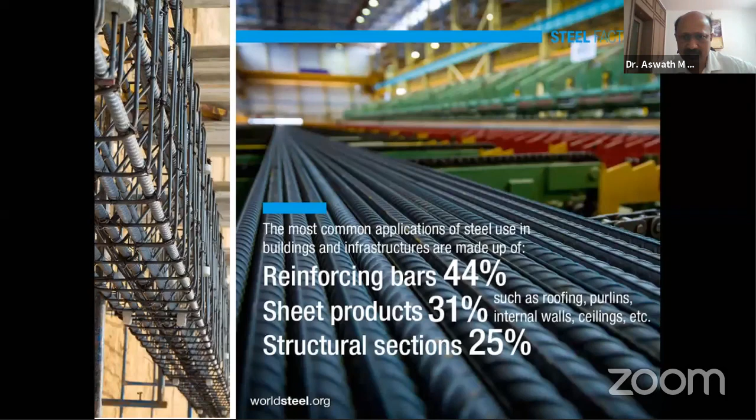Manufacturing, and where we have to bother about the quality of this steel, reinforcement steel, about 44%. So why we talk about quality?

As I mentioned earlier, quality is not just necessary for reinforcement steel, but it is also necessary for other products. Since our industry is not controlled, many of the products are manufactured without any quality control in place. Anybody who has got some finance can start product manufacturing in our industry.

And there are no strict guidelines or eligibility criteria for giving licenses to product manufacturers. So with this background, as users, as civil engineers, we have to be very careful about the quality, and we should identify and select the manufacturer and supplier of products based on their background and quality consciousness. Once we start recognizing quality conscious manufacturers and suppliers, then automatically the industry will transform from unorganized sector to organized sector, where quality will be one of the most important criteria.

As I mentioned earlier, for concrete products, we have been doing a lot of activities and programs, seminars, workshops, and other things to sensitize people about the quality of concrete. Now we should talk more and more about reinforcement steel also in the days to come.

So we have various issues in the civil engineering industry, whether it is storage of material, whether it is fabrication, various aspects. It may not be so bad as of now. Some time back, I've taken these photos from open source.

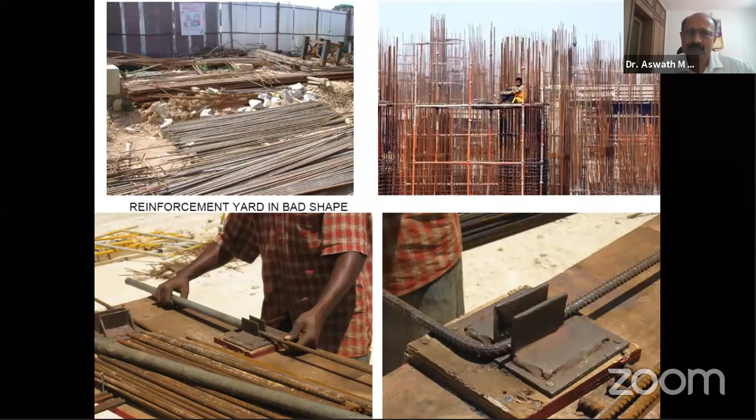You can also see some of these sites in the scenes where corrosion and other aspects are not taken care of, and demolished steel is also reused without processing. That is also another issue.

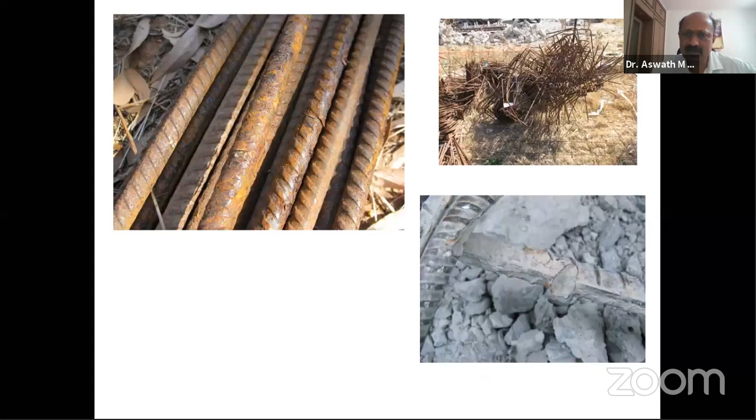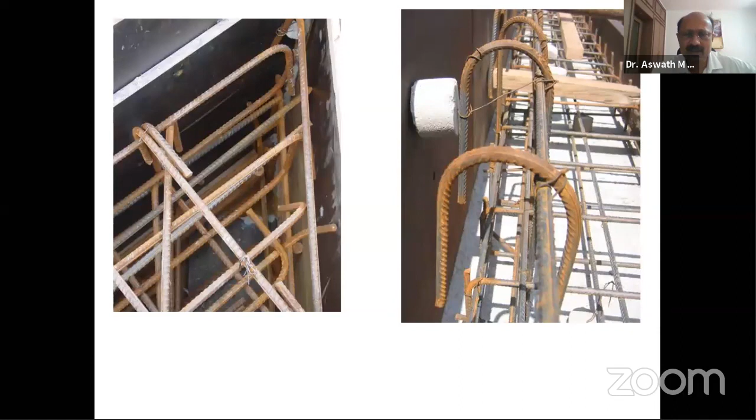And fabrication also has a lot of issues. We should know how to detail the reinforcement. So detailing of reinforcement is another major area. All of us involved in the analysis, design, and implementation should take care. And we can have one more webinar on detailing of reinforcement also.

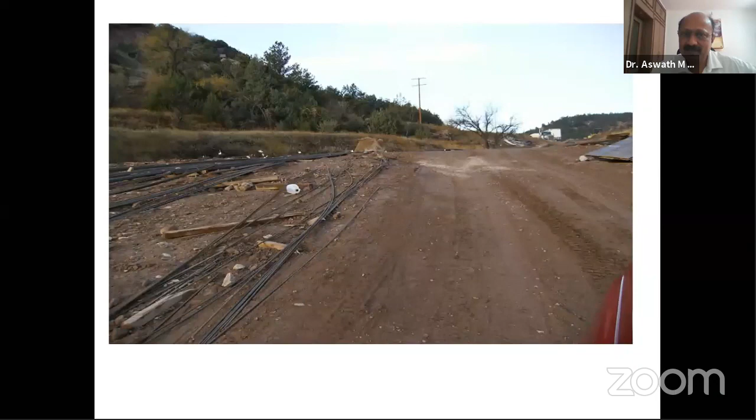And proper concreting methods are also very, very important. So these things are there. So when you look at these issues, we have construction quality as a whole as a major concern.

Even though many of the high-tech consulting firms are there, and multinationals are into the industry, and major projects—maybe construction quality is taken care of—but the medium and small industry projects, we still find some of these issues are there.

And definitely we should find solutions to all this, and address from the manufacturing process, and we should see whether the proper infrastructure is there to manufacture from a particular manufacturer, and selection of the manufacturer and supplier based on the quality systems that they have implemented.

Because that is the place basic properties of the material are concerned. Unless they have a proper infrastructure and manufacturing process in place, we will not get a good product.

So then understanding the properties and behavior of the material as a reinforcement, we need to understand. Then once we understand the properties and behavior, we become more sensitive to select a good product.

So how to store and use the reinforcement, again, there are a lot of aspects which make a lot of difference in the overall strength of the building. And testing of reinforcement and quality checks at each level.

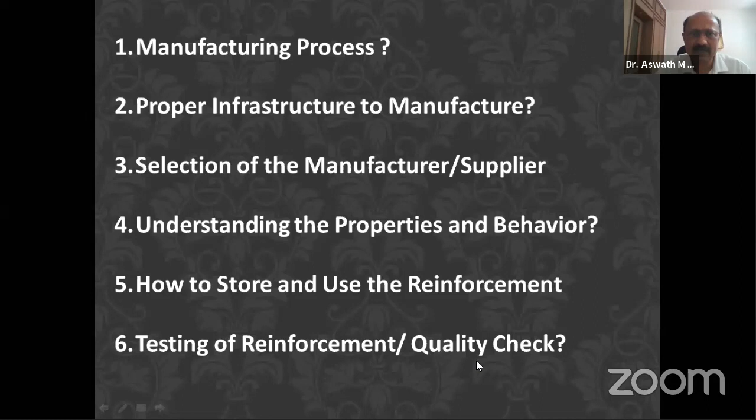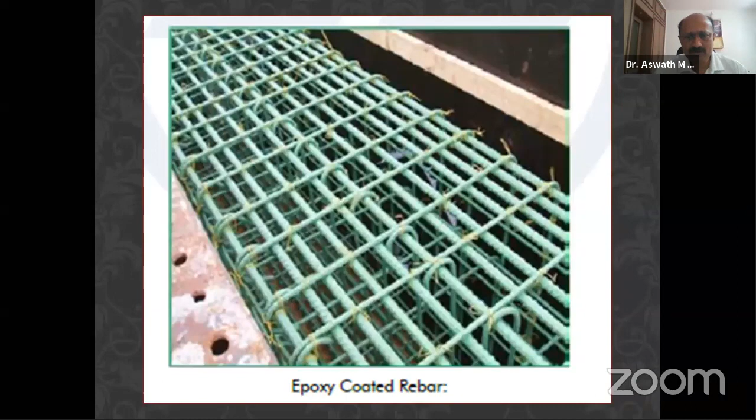So we have different types of reinforcement bars. You have deformed bars, stainless steel bars, epoxy coated reinforcement bars, then galvanized rebars, and FRP bars are very popular these days.

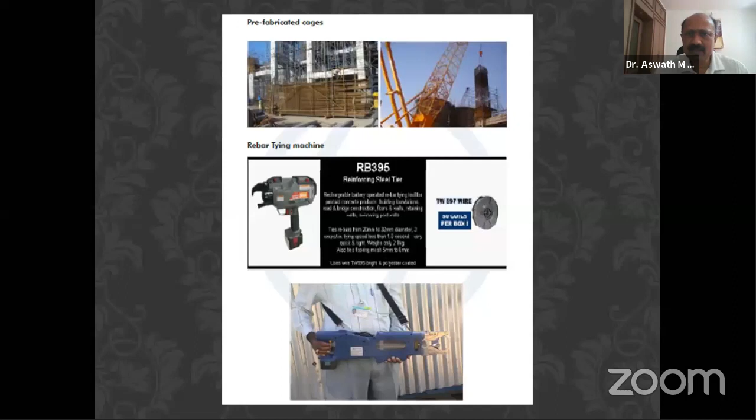A lot is talked about the equipment used for reinforcement fabrication and other things. Rebar tying machines are available. We should use all these latest methods to minimize loss and improve the efficiency of use.

We are having a lot of couplers in place. We can save material if you use proper couplers.

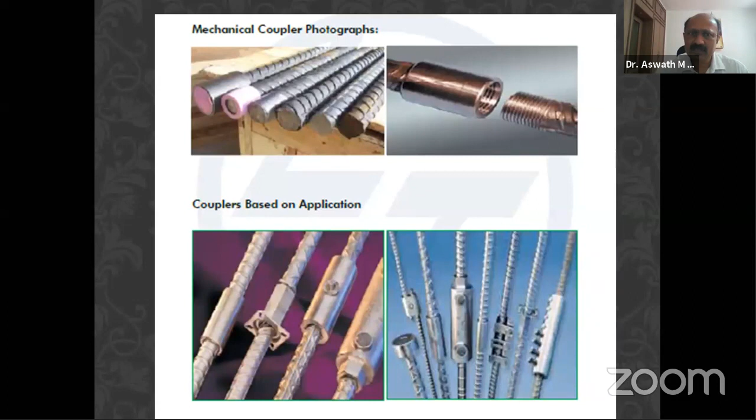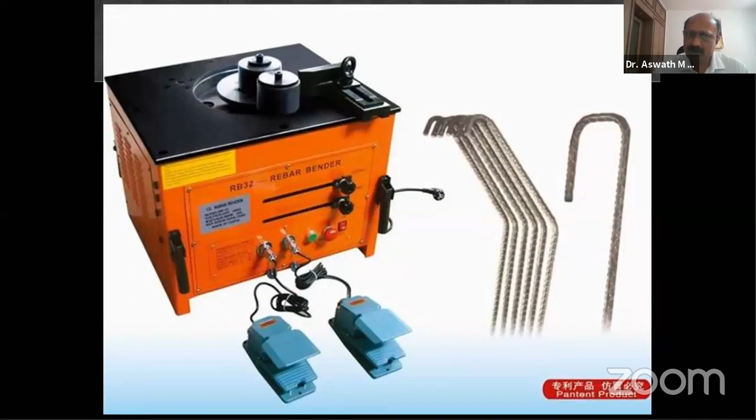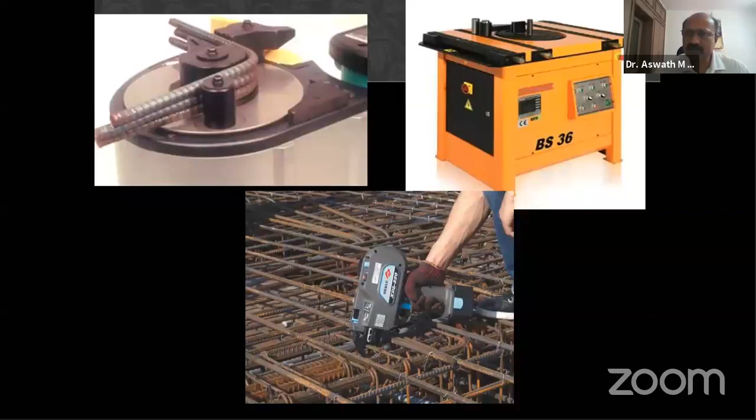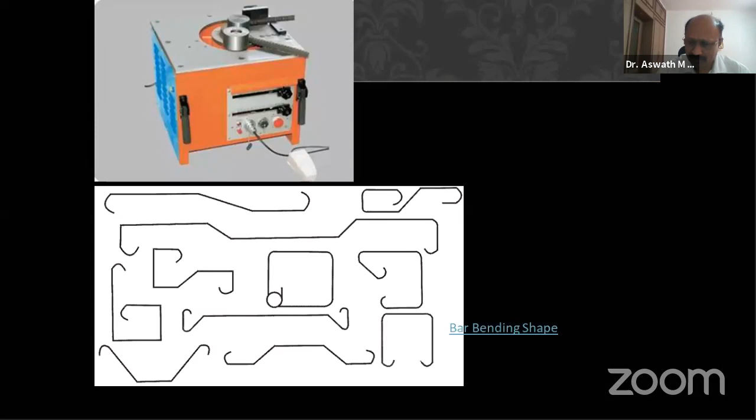We have different tests for the reinforcement, and bar bending machines are available these days. There are a lot of solutions available based on each of the problems we face in the industry, developed by various manufacturers. We should be aware of what is available, and based on that knowledge, select the best material, product, and equipment for reinforcement. Bar bending is a major aspect in reinforcement steel, but many times we use bar benders who are not skilled or properly trained, so we end up with a lot of problems as far as bar bending is concerned.

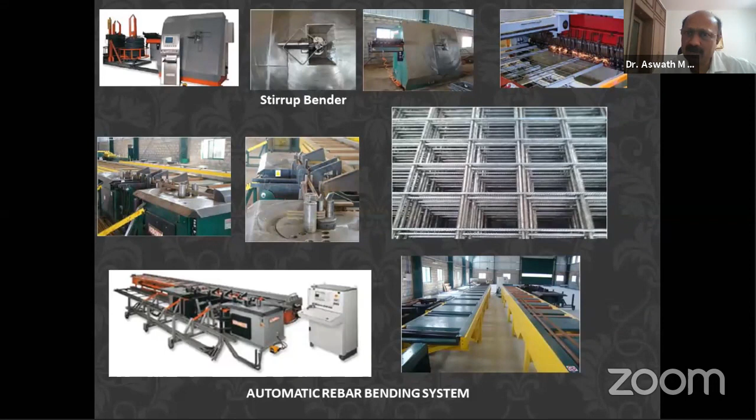Automatic rebar bending systems are also in place to address bar bending issues. Now many people are coming into the industry who, if you give them the reinforcement drawing or execution drawing, will supply ready-made steel. You can just bring it, place it, and start concreting.

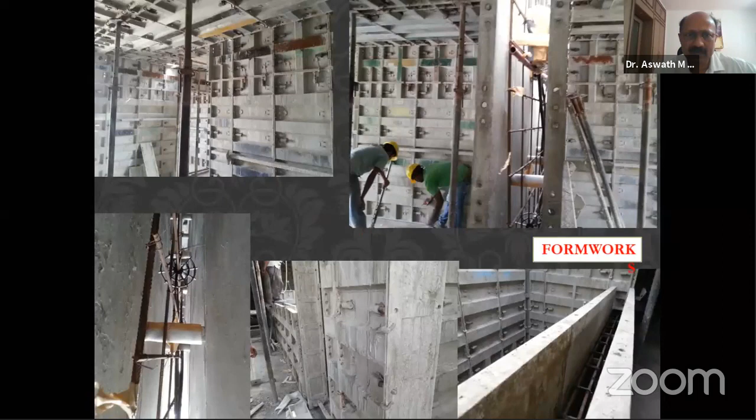This is also getting more visible in the industry. And the accessories used with reinforcement - cover blocks and other chairs, as we normally call them - take care of these aspects. Each of these is a major area where the user should be aware of the different products available. Formwork is also another major factor responsible for the quality of the structure and the use of reinforcement.

From M15 concrete, now we are talking about M200. We have already demonstrated M200 concrete in one of our concrete webinars at the Indian Concrete Institute. But widely, people are now using M60 and M80 grade concretes, and M120 is also used in some projects. As we use higher grade concretes, we reduce material usage.

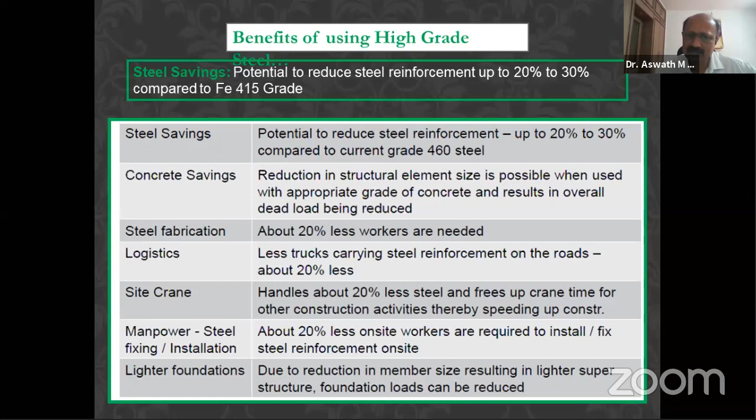Similarly in steel, we used Fe 415 steel; now we are talking about Fe 600 grade steel. So it is always better to select a good manufacturer and use higher grade steels. There are a lot of benefits if you use high grade steels, so we should promote more usage of high grade steels to reduce material usage.

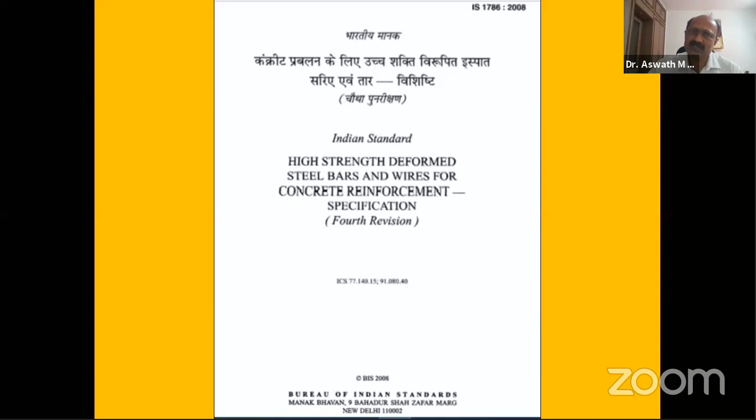For all this, our Bible is IS 1786:2008, amended in 2012. This is our major reference. When we talk about concrete, we have IS 456. When we talk about structural steel, we have IS 800. And when we talk about reinforcing bars, our Bible is IS 1786, high strength deformed bars and wires for concrete reinforcement specification. I strongly recommend all users of reinforcement steel read IS 1786 completely and understand every word printed in this code - it is very, very important.

In the industry, we have all these materials: Fe415, Fe415D, Fe415S, Fe500, Fe500D, Fe500S, Fe550, Fe550D, and Fe600. Now Fe415 has very minimal use and is not available unless you demand it from manufacturers. The majority of manufacturers produce Fe500 and Fe550. If you ask, they will also supply Fe600. These are the major grades.

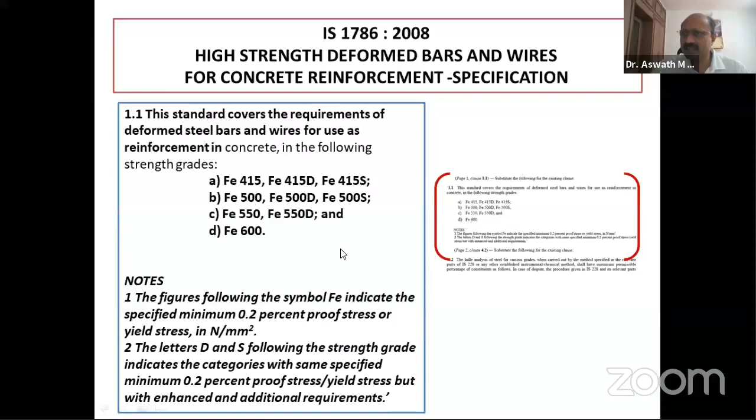I have taken an extract from IS 1786, and these are very, very important. Let us focus more on these high grade steels which are presently used in the industry, especially in the form of TMT, thermomechanically treated bars.

When it comes to the composition of steel, normally we don't give a lot of importance to the chemical analysis of the material. As site engineers or project engineers, we check for tensile strength of the reinforcement, and when it comes to concrete, we do the cube test for compressive strength. When it comes to steel, we check tensile strength. But compressive strength and tensile strength are not the only two strengths responsible for the overall safety, longevity, and durability of the structure. There are many other issues also responsible for the long-term efficiency of the building.

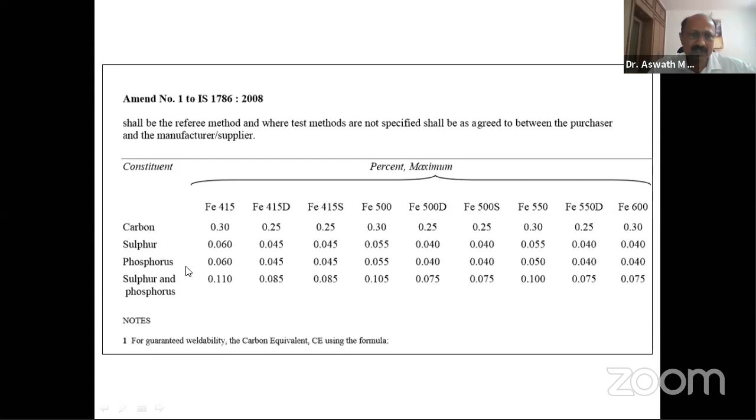When we talk about reinforcement steel as per the IS 1786 amendment, these are the major ingredients responsible for the properties of the steel: carbon content, sulfur content, phosphorus content, and the combination of sulfur and phosphorus - these should be as per code 1786. For Fe 500, the carbon content is maximum up to 0.3%. Initially I mentioned the maximum usage should be about 2% for various other types of steel, but for reinforcement steel, carbon content should be less than 0.3%. Sulfur should be less than 0.055%, phosphorus 0.055%, and sulfur and phosphorus together should be less than 0.105% for this particular grade. For other grades of steel, it is mentioned in the code. This is mainly responsible for the properties of the steel.

And the nominal sizes of bars are available in the market, ranging from 4 mm to 50 mm. 8 mm, 10 mm, 12, 16, 20, and 25 are widely used. The higher diameters of 28, 32, 36, 40, 45 to 50 mm are not widely used, but are available in the market.

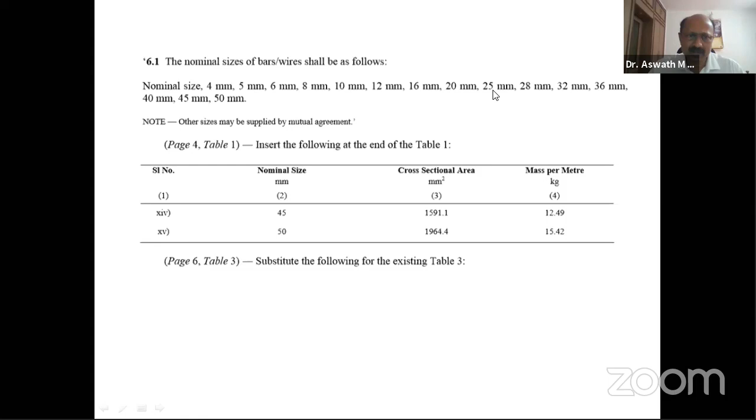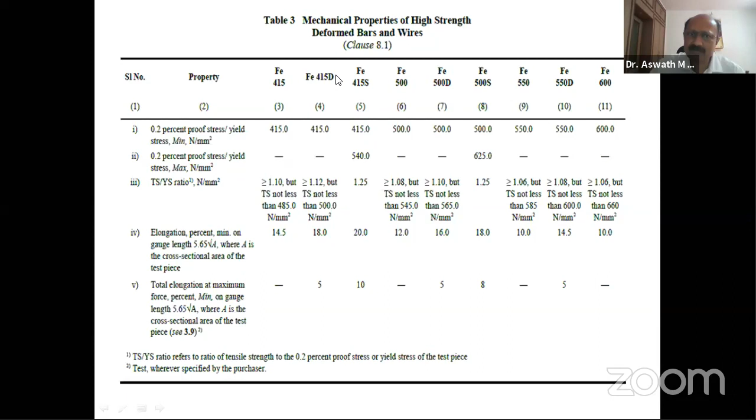So this table should be remembered by all civil engineers when using reinforcement steel, and it is very important. Many manufacturers don't give a lot of thrust in maintaining these elongation ratios. For example, for Fe415D it should be about 18%, and for Fe500 it should be about 12%. So this is also very important.

Elongation and total elongation are also given, and the ratios of TS by YS should also be properly maintained. So when you test the material, these aspects should be taken care of.

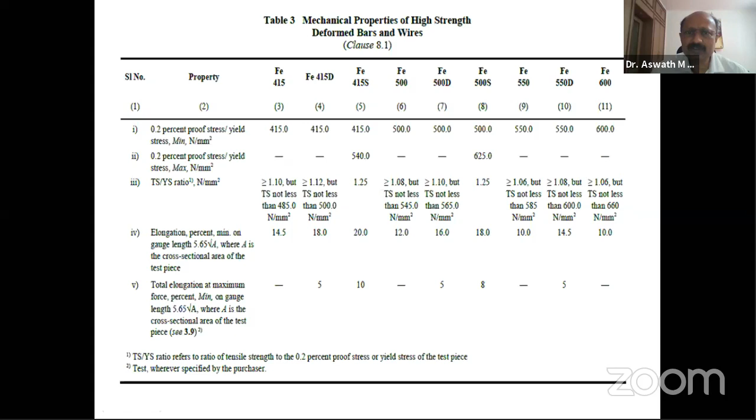And the composition of the various chemicals, the chemical analysis, if you do it, normally you have a lot of instruments to check the chemical composition of reinforcement bar. Spectrometers are available which give you up to 27 elements present in the steel reinforcement. Based on that analysis, if you look at the contents and identify these materials, based on the percentage of materials present, the mechanical properties of the material will also change.

For example, carbon - higher carbon contributes to the tensile strength. So that means more percentage of carbon gives more tensile strength, but you should be very careful - higher load bearing capacity and vice versa. Lower carbon content, less than 0.1%, will reduce the strength.

Higher carbon content of 0.3% and above makes the steel bar unweldable and brittle. So you cannot increase the carbon content just because you get good tensile strength, because if it is more than 0.3%, the material becomes unweldable and brittle. So therefore you have to be very careful about using the carbon content.

We are also very particular about sulfur and phosphorus. Higher content of sulfur and phosphorus is very bad for reinforcement. For example, presence of sulfur should be limited as per IS 1786. Presence of higher sulfur makes the bar brittle during twisting, as higher sulfur content brings the hot shortness problem during rolling. So when you do the bending and rebending test, if you have more sulfur and phosphorus, it becomes very difficult for bending or fabrication operations.

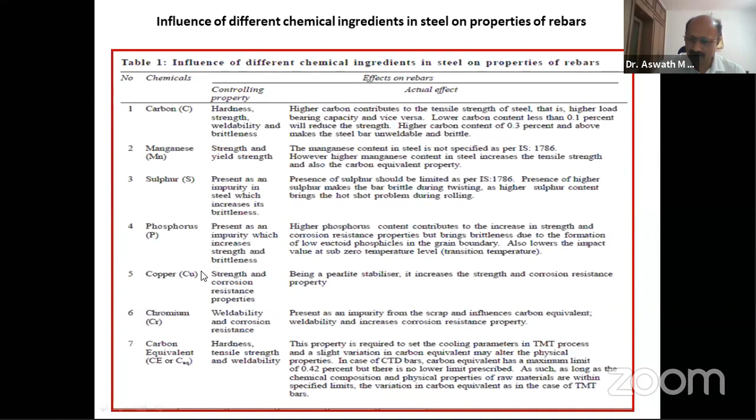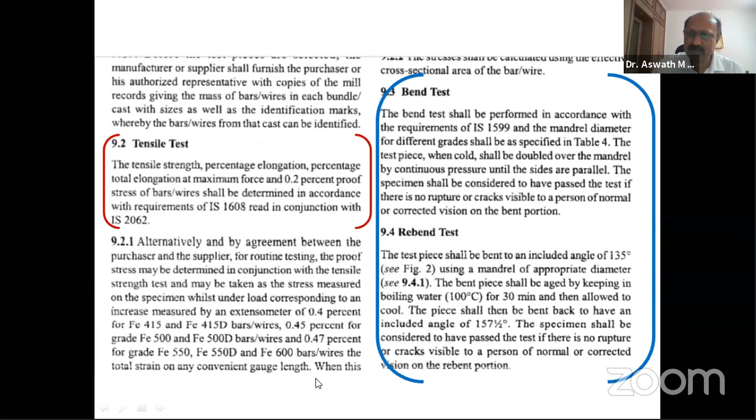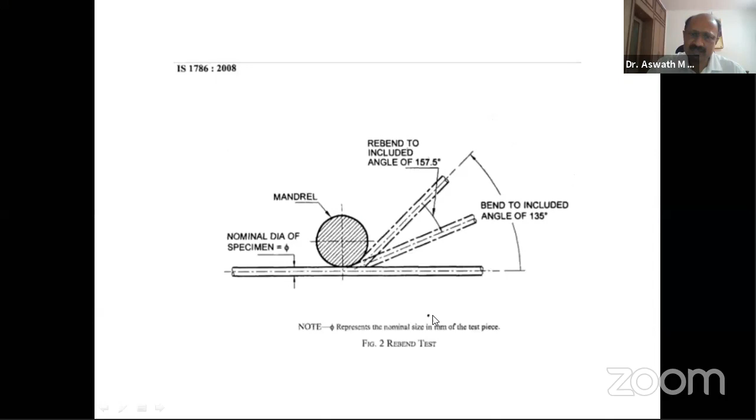I will not get into the procedural aspects of testing, as clear indications and procedures are given in IS 1786 and other relevant codes. Use that, or use the facilities available in one of the accredited laboratories as per NABL, and you get good quality test results and properties of the material. The mandrel diameters for rebend tests are given in the code, and this should be used for effective testing methods.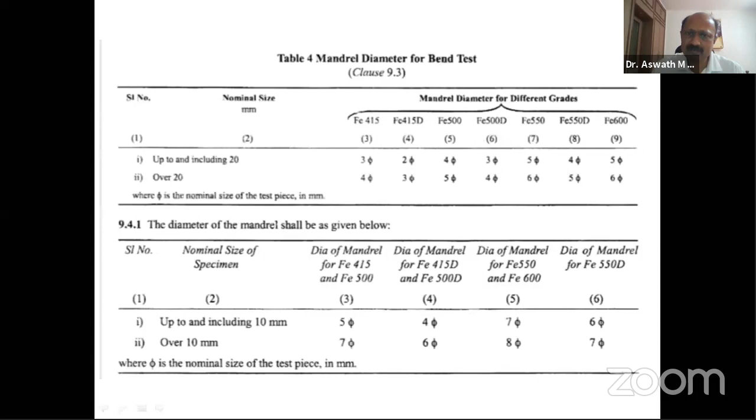So some sample specifications for reinforcement. I've talked more about IS 1786 and should not be boring for all of you. The main codes are IS 432, IS 1786, and IS 2062. These three codes are mainly important for mild steel, high strength steel, and structural steel.

Read these guidelines given by BIS. I'm very happy to state that the Bureau of Indian Standards is very efficient and active these days. The BIS Civil Engineering Division is headed by Mr. Sanjay Pant, and he is taking a lot of effort in revising all the codes. Earlier, to get a code revised, we used to wait for 10-15 years. Now, every year, a lot of codes are revised as per the requirement of the construction and civil engineering industry. You can visit the BIS website, contribute to the development of the codes, and send your comments for revision. So a lot of opportunities are available for civil engineers to get into codal formation and preparation. You can visit the BIS website for more details.

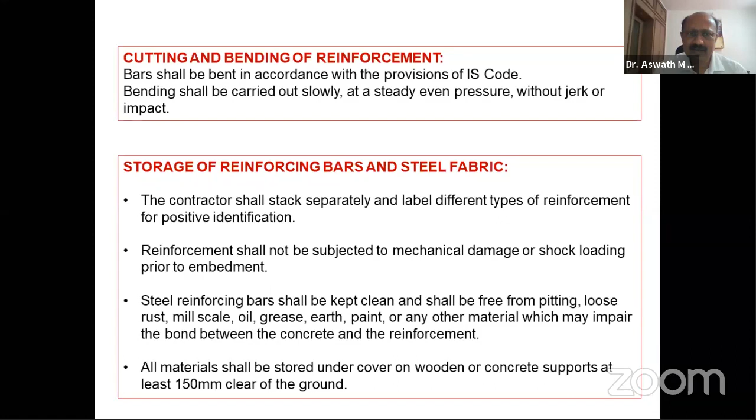As I mentioned earlier, there are a lot of accessories like spacer blocks, cover blocks, chairs and others, so we should know how to use them effectively. Cutting and bending is another major aspect, and again we have a code for that which we should use effectively. Storage of reinforcement bars and steel fabric is also important, and we have to use proper methods and checks to take care of reinforcement at the site. Fixing reinforcement is the major job, that is the detailing of reinforcement, which should be done as per the structural engineers' recommendations and the detailing code of IS.

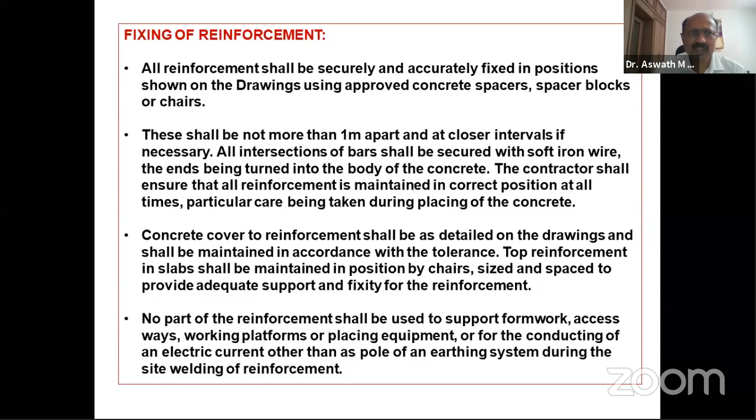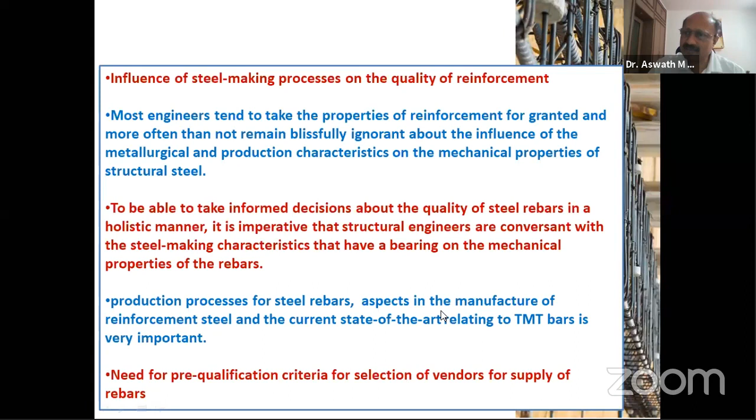Now come back to where the bar quality is affected. Checking, testing, and usage of reinforcement is the responsibility of the structural consultant and project engineer, but if the material itself is not good, then we can't do anything. Whatever methods we adopt to take care of quality becomes waste. So the influencing factor for quality of reinforcement is the manufacturing process, the steel making process. We should give a lot of importance to the manufacturer while selecting reinforcement, and the characteristics of steel reinforcement are also very important for strength, ductility, and corrosion resistance. These aspects we should take care of.

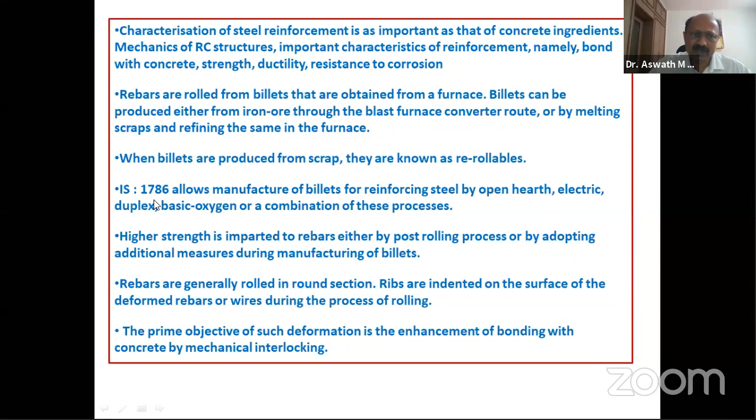IS 1786, as I said, is very important. There are different types of twisting of bars, but I will not get into it. Now, most of the steel we are using in the construction industry as reinforcement rebars is TMT bars, thermomechanically treated bars, introduced in India during 1980 and 85.

Thermomechanical treatment is an advanced heat treatment process in which hot bars coming out of the last rolling mill stand are rapidly quenched through a series of water jets. At 1700 degrees Celsius, the molten material comes into billets, and the billets are rolled into reinforcement bars. In this process, the hot bar should be cooled to normal temperature, and this cooling and quenching process is very important. If you take care of this process effectively, you get good quality TMT bars.

Rapid quenching provides intensive cooling of the surface, resulting in the bar having a hardened surface with a hot core. The rebars are then allowed to cool in ambient conditions. During this slow cooling, the heat released from the core tempers the hardened surface, while the core is turned into a ferrite-pearlite aggregate composition. This is an actual sample I have taken from a factory. After this proper quenching system, you get rings like this, which in the field people use as a ring test. You have to conduct a ring test on a reinforcement bar, and if you get three rings like this - the core, the transition layer, and the outer hardened surface - then it is a good quality, properly manufactured TMT bar.

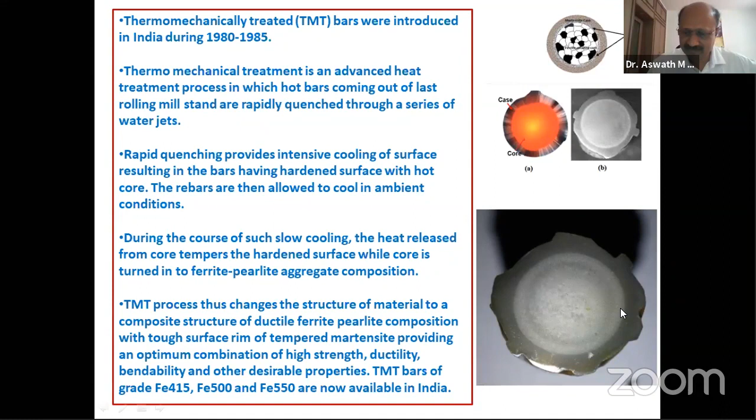So this is the process of TMT bar. It is a heat treatment while manufacturing the steel. So you can identify the bar. This is one common test everybody can do at site for identifying whether it is a good quality TMT bar or not - to identify a quenched and tempered TMT bar.

Project site engineers and all civil engineers should be able to distinguish and identify good quality bars. Ensure the mill that has supplied the rebars has genuine quenching and tempering technology. Check whether the Q&T technology supplied to the mill is by an authorized and competent organization. Check the license. All these things we don't do, but if you identify a good manufacturer, they will take care of all these things.

So what is the field test? Field test the rebars at random. The first thing to be done is filing the surface of the rebar with the help of workers using a rough file. A site worker will easily recognize if the surface is hard or soft. All Q&T bars have a harder surface than unquenched bars.

Finally, a random sample should be drawn. You take a sample reinforcement bar from the lot, and you finish the surface with emery paper and a small file, and then the cross section is smoothened to a fine polished state by grinder and emery paper. The smooth end of the sample is then pickled in a nitrol solution, 5 to 10% nitric acid balanced with ethyl alcohol. The result should show a uniform tempered martensite periphery with a softer core in case of a good TMT bar.

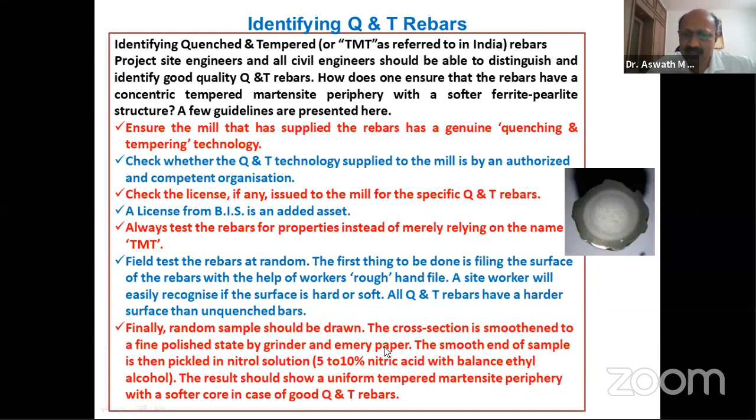So when you press this reinforcement bar's finished surface into the nitrol solution, you should get a surface like this, and you should be able to identify by naked eye the three rings of the bar. If you get that, then you can say it is a good quality TMT bar. So in the absence of other more refined tests, this can be done by any engineer with a simple test of dipping into the nitrol solution at the site.

So as I said, the process of manufacturing is very, very important. I'll run through the process, I think we have time. So if you're using the reinforcement continuously for your projects, it is absolutely necessary for you to make a visit to the manufacturing plant.

Like we visit the RMC plant before ordering concrete, we will send our project engineer or quality engineer to the RMC plant to check how the plant is managed, whether the skilled workforce is there in the plant or not. Everything depends on however automated the industry we are talking about is. Unless we have trained, skilled manpower at the plant, it is very difficult to manage the process. So you need to have trained, skilled manpower for RMC production.

Similarly, you need to have trained engineers, or metallurgists specific to the steel industry, at the plant who can process the manufacturing for the steel as per the requirements of the IS codes. So visit the plant and get convinced yourself about the manufacturing process and the quality checks that they are following. If the manufacturing process is good, then automatically we get good quality reinforcement steel. So I insist all users get convinced about the quality of the manufacturing process before you order your reinforcement steel. As such, we don't have any certifying systems for the reinforcement steel industry.

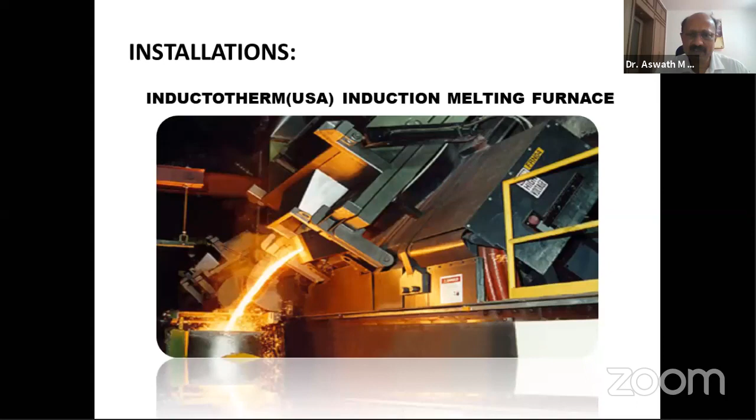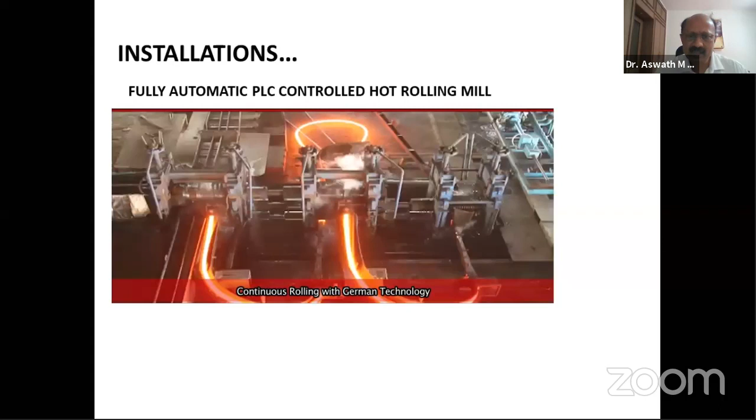We have QCI certification for RMC plants. Similarly, we need to evolve, in the days to come, some kind of certifying process for the reinforcement industry also, the steel manufacturing industry also. So normally they will have a continuous billet caster if they have good infrastructure for manufacturing the steel. Then you have fully automatic controlled hot rolling systems in the industry for good infrastructure for manufacturing.

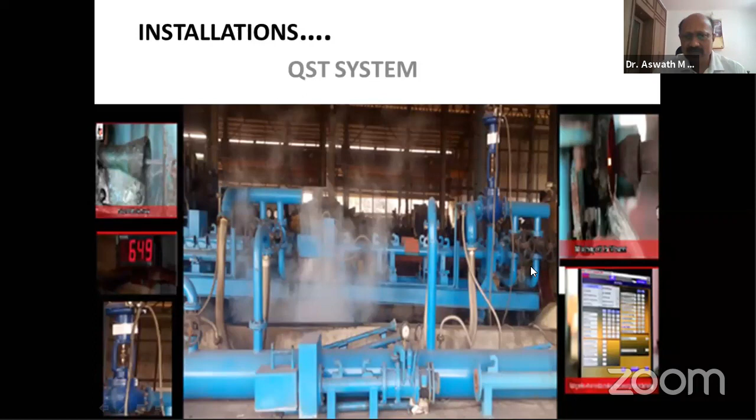Then you should have an automatic cooling bed once the bar is cut into different sizes. And during the raw material stage, as I mentioned earlier, many of the good manufacturers use a spectrometer for chemical analysis of the raw material.

Once they use raw material, before moving forward for the manufacture of steel, they should check the samples. I have taken this from one of the manufacturers' testing facility.

The spectrometer will give about 27 chemical elements, the composition of chemical elements, and you get a computer generated tabular result like this, and you have to see the composition of the various materials. Compare with IS 1786, what is the maximum allowed percentage of the materials of various chemicals, and remodel the mix, in other words the composition of the raw material.

If something is less than required, then you have to add, and if it is more, you have to eliminate. That process you have to do before allowing continuation of the manufacturing process. So spectrometer analysis is very, very important, and it determines the durability of the material also.

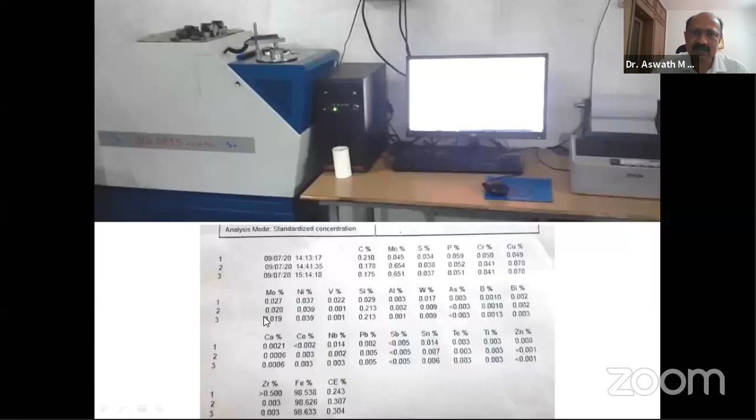And you get a sample test like this. This is a report generated by the spectrometer. The date and timing is also mentioned, so that gives an indication for every batch of manufacturing of the billet. You do this test very systematically, and you get the combination of all 27 elements here. This is one of the very, very important facilities any manufacturer should have at their manufacturing plant.

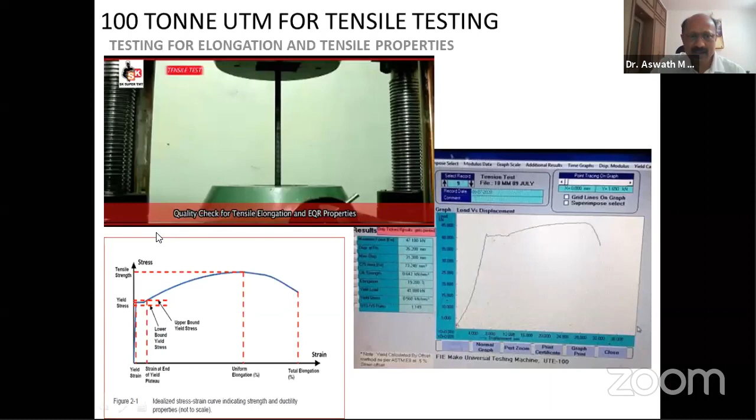After manufacturing, you have to test the bars as per the sampling requirements in the factory itself, and see whether you get good performance of the material as per the standard requirement at the site itself. So this is sample collection and testing at the site during the charging process.

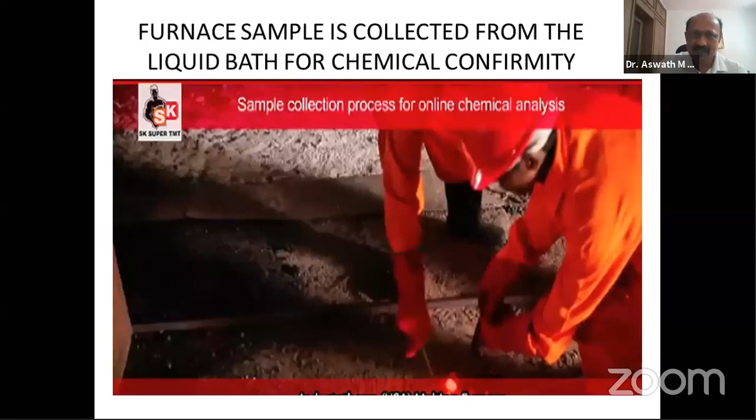These images are just showing you for the purpose of understanding what is the manufacturing process and how important it is. This is the quenching of bars, how the hot bar which gets into the quenching system comes out after cooling.

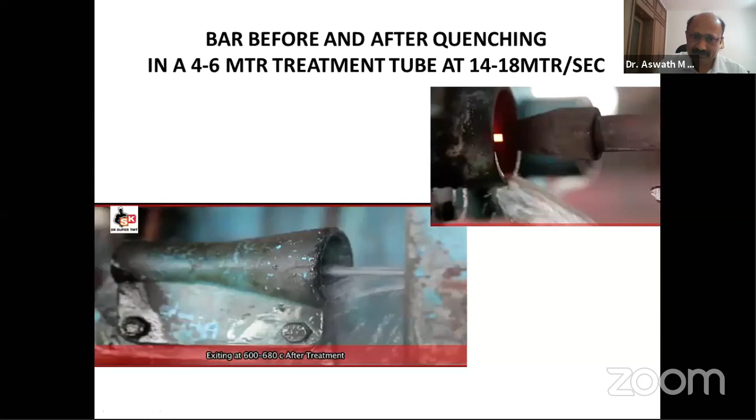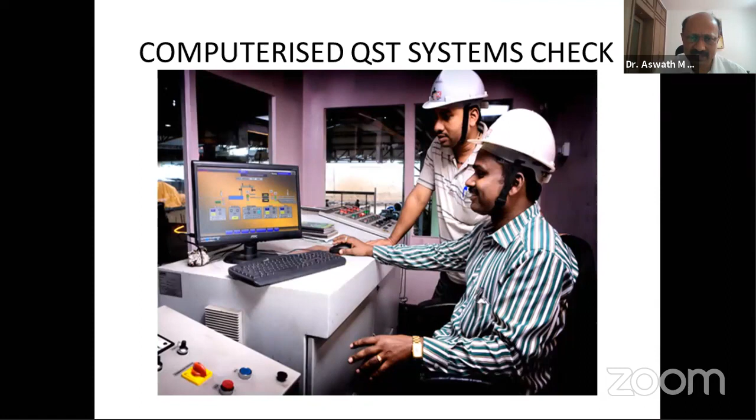Outlet bar temperature control panel. Almost all good manufacturers will have automated computerized QST system these days, and it will ensure good quality manufacturing, will also ensure the grade. The allowance is about plus or minus 20 degrees Celsius.

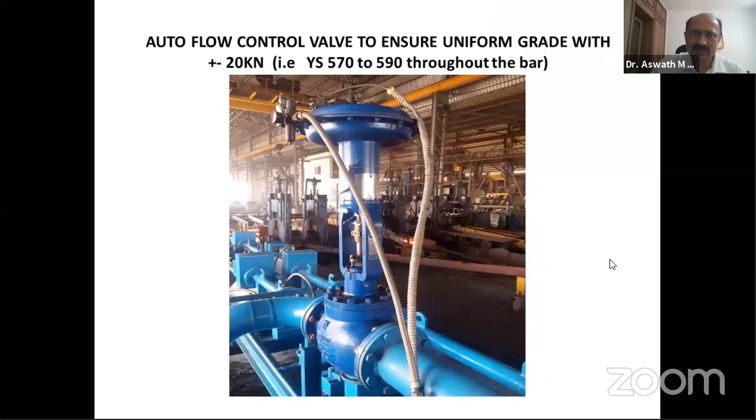And you will have automatic bending and cutting machines at the place.

So the next few minutes... Rahul, I think I have some more time.

Okay, the defects in rolled steel inspection and testing. Some checklists I have given here at the end, before concluding. I think it's very, very important for all of you to take care of this. In order to produce satisfactory rebar products, it is important that an adequate quality control system be established and maintained. This system should include mechanical and metallurgical testing as required, and the inspection of the surface and other defects.

Metallurgical testing: the complete process is a metallurgy-driven one, and a metallurgist is very, very important to be stationed in the manufacturing plant to control the chemical composition of the reinforcement.

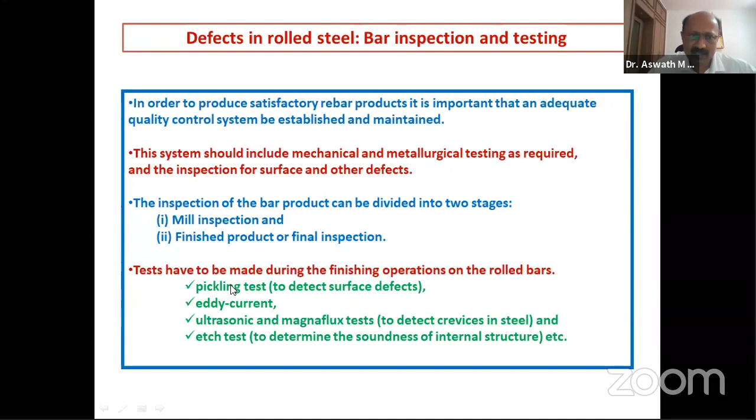The inspection of the steel bar product can be divided into two stages: mill inspection and finished product or final inspection. Tests have to be made during the finishing operation on the rolled bars: pickling test, eddy current test, ultrasonic and magnaflux test, and etch test.

Manufacturer record and delivery documentation: you have to insist on this as per 1786 and other relevant codes. The manufacturer should give some basic information to the user along with the supply. The manufacturer shall establish and maintain the records required and shall identify the steel reinforcing bars and their delivery documentation accordingly. For each delivery, the manufacturer shall supply the following information. It is mandatory; you can demand all this information from any supplier. It is not just bring and dump on the site and go.

Manufacturer's name and place of production, nominal diameter and grade, the heat cast number and cast analysis including all specified elements and elements used for calculation of the carbon equivalent value, the results of the tensile test and rebend test, the mass per meter or weight of the reinforcement bar, the results of surface geometry measurement or beam test, the manufacturing process route — which method, as we discussed earlier there are two routes of manufacturing — which method they have followed. For ribbed steel reinforcing bar, the rolled-on identification mark on the bar: they have to print the IS number and the brand mark that should be there, and result of a fatigue test if required by the purchaser.

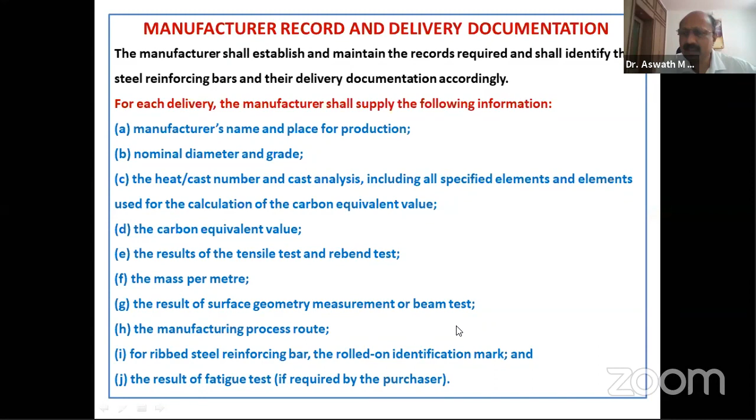This is optional. All other information should be supplied along with your delivery list, along with the bill, in other words.

So, checklist for initial scrutiny of drawings and schedules — this is also very, very important. We may talk about so many things, the manufacturing method should be like that, everything. But finally, before implementing the reinforcement, before using the reinforcement, if you take care of all these issues, then automatically we can avoid a lot of unwanted items, and we can focus on the quality.

Can the reinforcement as detailed be fixed? Does the detailing permit sensible location of construction joints?

Sometimes it is also very important that the site engineer and project engineer, especially the civil engineer responsible for fabrication of the steel at site, should have knowledge of all these things and detailing exposure. You cannot, most of the times, blindly assume that a drawing coming from a consultant can be directly implemented. You should glance at the drawing and identify whether it is okay or not. Sometimes, in a hurry or under demand pressure at site for the drawings, a junior might have released the drawing without scrutiny from the higher ups. So you cannot simply implement the drawing as it comes from the consultant.

I'm not blaming the consulting offices, but it is also very important that as civil engineers, we should glance through, and if anything abnormal is visible in the drawing, it should be brought to the notice of the consultant and rectified before using. Because once you cast the reinforced concrete, it is very difficult to undo the process. Many times, even though we identify small mistakes after concreting, we ignore them. We don't undo the process, we don't demolish and redo the work. So with this in mind, these tips are very, very important for all civil engineers.

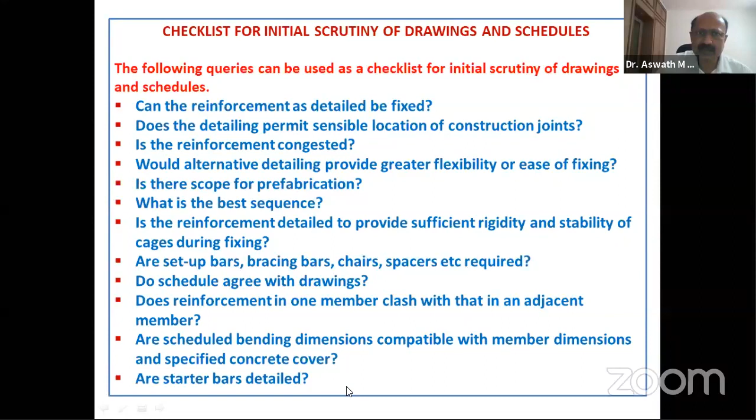So, for the delivery checklist: ensure adequate offloading space, check weights given on the delivery ticket, ensure correct handling during unloading, check reinforcement is of the correct type, bundles are correctly labeled, and check reinforcement is of the correct grade.

This is very, very important. Normally, they supply the steel and you use it. You might have ordered Fe 500, or 500D, or 500S. You need to check whether you're getting the same steel at the site.

Before issuing to site fabrication, you should check all this. Check the bar sizes - this is also very, very important. Many times, small variation in bar diameters, if not properly checked, means instead of using 16 mm you might end up using 12 mm or 20 mm. This kind of mistake also happens on bigger sites, so the project engineer should be very careful about all these things.

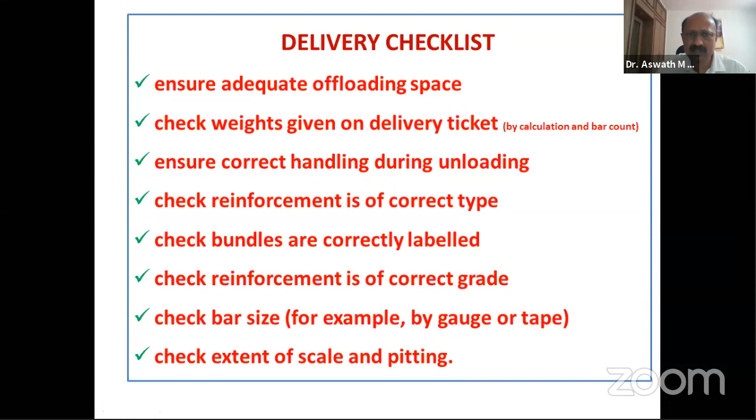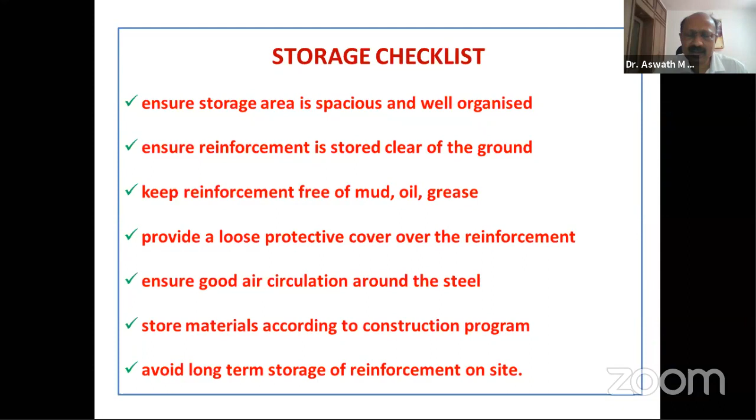You should also look at the scale and pitting of the bars, whether it is good textured bars. Similarly, you have a storage checklist - I will run through it. You should store the steel as per the guidelines of the codal provisions. There's also a bending checklist, which I'll run through.

There's a pre-concreting checklist with a lot of checkpoints. We will take up some questions and come back if necessary, so you can go through it - it's easy to understand.

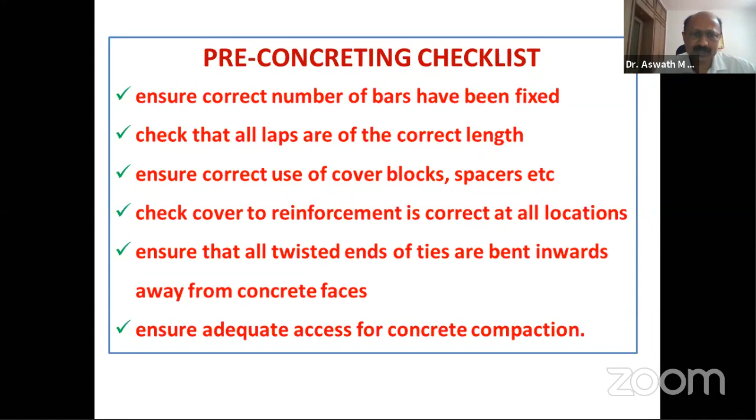Site actions definitely influence cost. If you properly manage steel selection and usage through all these methods, you can save a lot of material, and cost is also very, very important for all projects. You can minimize project cost by taking care of proper quality measures, not only for reinforcement but for all materials used on site.

Many times these days we see a lot of scope for retrofitting and rehabilitation - it is becoming a huge industry now. Just after 5 or 6 years, buildings are subjected to repairs and retrofitting. This is because we don't take proper adequate quality measures during selection of raw materials and construction materials before using them. So if you focus more here, maintenance issues will be very minimal.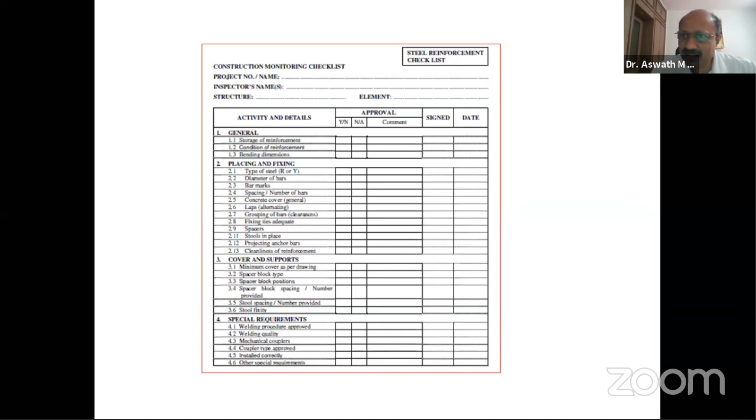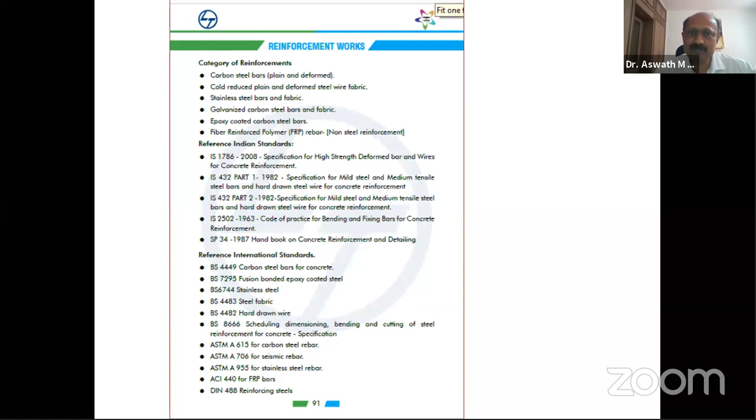So, reinforcement was categorized by types of reinforcements. All these things are given with due acknowledgement to all the people whose references were taken, only for the concrete.

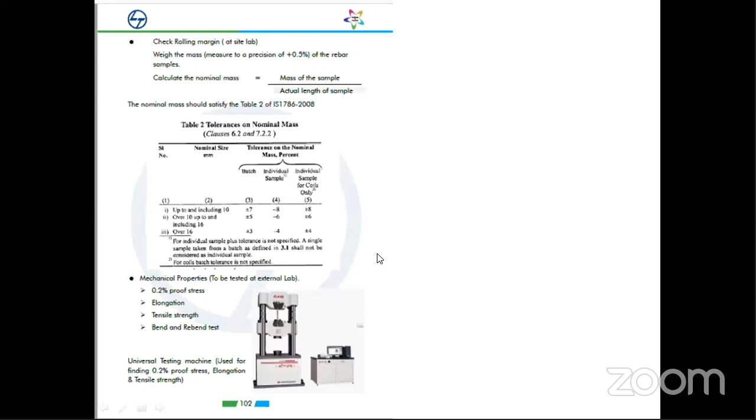ICI and some manufacturers have come out with some guidelines for student education also. Some of these charts show the various IS codes available. About 39 to 40 IS sectional divisions are there. You can choose to work in any of these and assist the Bureau of Indian Standards in revising the codal provisions. The most important reinforcement steel related codes I have listed here.

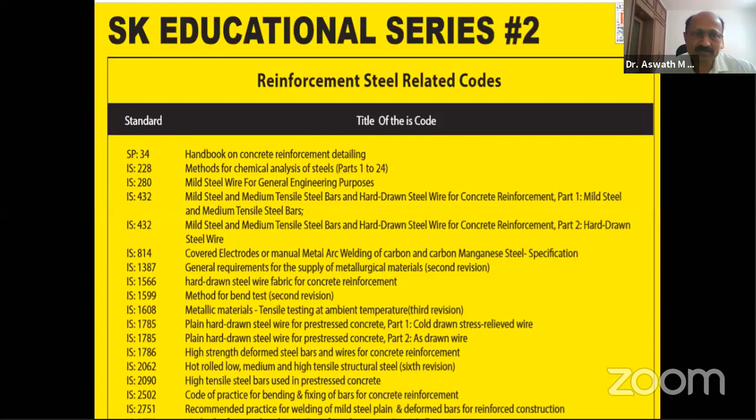You can go through these codes to understand and effectively use the reinforcement. As a civil engineer, it is mandatory that you go through all these code books, which is very essential. When you have sound knowledge of a material or product, then you have authority in deciding and using the material. To be a popular and efficient consultant or engineer in the field, we need to go through all these codes and stay conversant with all the codal provisions and revisions as and when BIS releases them.

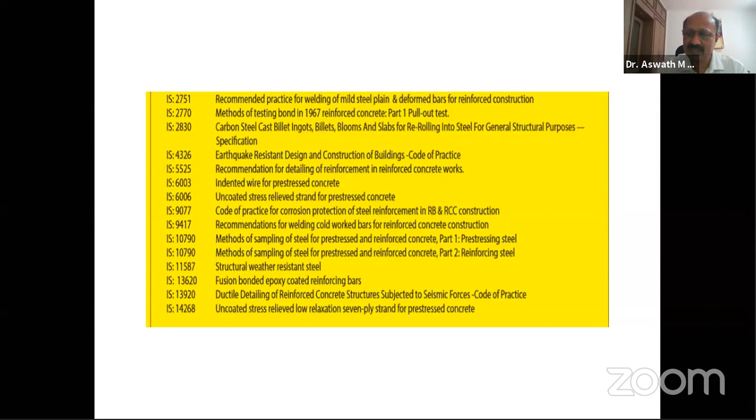So I've used some references, which you can also go through. The ICJ journal carried an article by S.A. Reddi and others which talks about certification and validation aspects, some of which I've taken into this presentation. You can also look at the World Steel Organization, IBEF, and newsletters released from various stakeholders. You can also visit the manufacturers' websites to understand the quality systems they adopt for manufacturing.

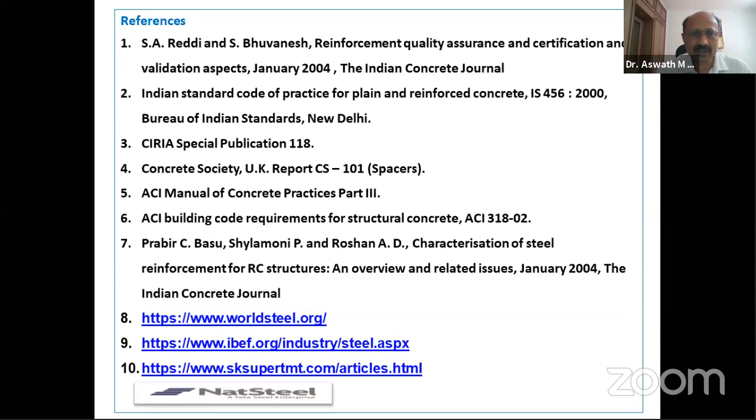I'm also involved in preparing a reference manual for field engineers on building construction. This was released by the Task Force for Quality Assurance in Public Constructions, Government of Karnataka. This book is freely available to download at the KPWD, Karnataka Public Works Department, website.

You can click on this, or directly click on this link, to download a very good volume of reference manual material. You can go through that. It not only talks about reinforcement aspects, but starting from reading architectural drawings to execution, all aspects involved in the construction industry are briefly dealt with in this handbook.

This handbook was prepared under the guidance of late Dr. C.S. Vishwanatha as chairman of the task force. When he was the task force chairman, I was fortunate enough to be involved in preparing this manual as editor in chief, under the guidance of engineer L. Ravindranath as member secretary. The who's who in the construction industry, the top consultants, were all involved in preparing this document.

This document is a very good reference for all of you to go through. It can be downloaded very easily. So thank you very much. I think I've completed - we have taken 10 minutes extra.

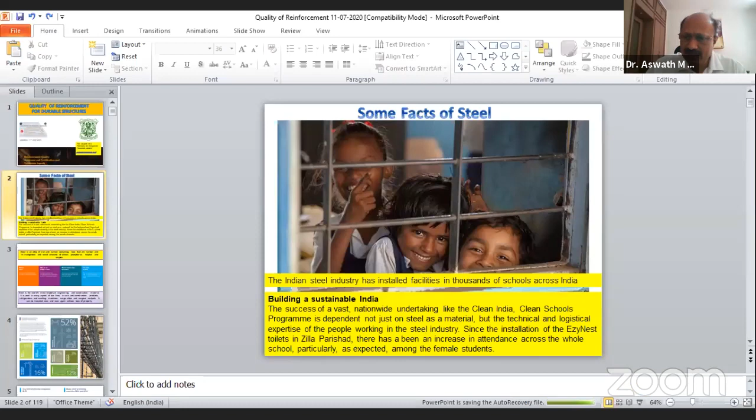No sir, manufacturers generally will give that MTC, but the problem with the third party test - is there any rules and regulations to get it compulsorily done? Sir, it is mandatory for all the batches. So whenever you are getting a huge quantity of reinforcement steel, you can ask - if they change the batch of raw materials, then for every batch you can insist on this test, and randomly you can take samples and get it done by third party laboratories.

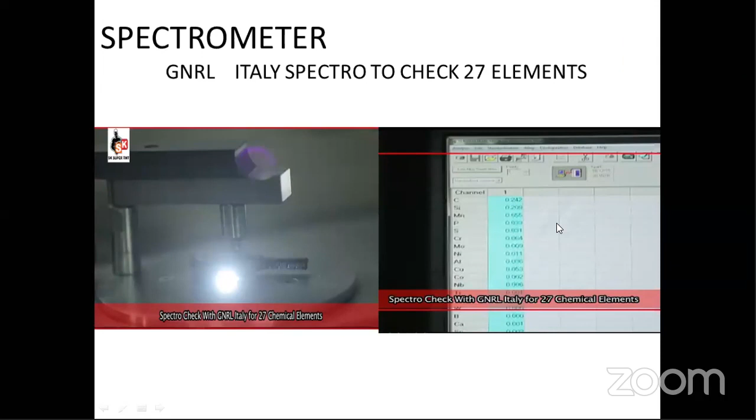So this is the test - a simple billet sample, and you get the complete analysis.

Sir, one more thing regarding fiber instead of steel - as you said, 56% of steel is used in the construction industry, so introducing fibers into it, like PVC solid bars for minor structures. Any input on that, sir?

Fiber reinforced concrete is developing very fast. In fact, some consultants, like Mr. Basuraj of Chetana Consultants - the dream is to not use reinforcement steel at all in concreting, to reduce it to a minimum stage and use only fiber reinforced concrete. As of now we are not in that stage, but adding fibers will definitely increase the tensile strength properties. I'm in touch with Basuraj, sir. As a replacement of reinforcement steel, we are not at that stage as of now.

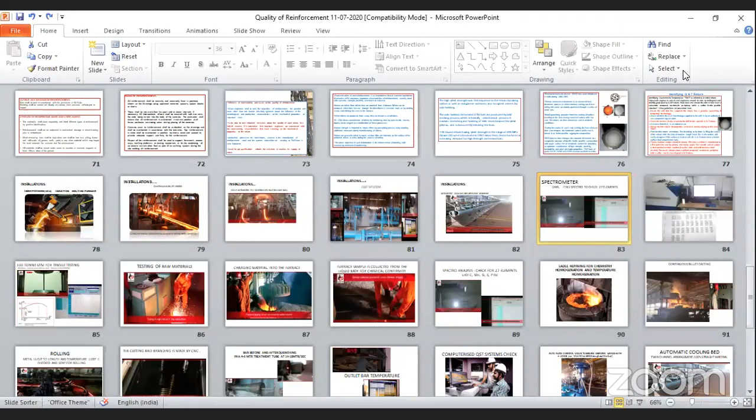Audible, sir? Myself, any other questions? Hello, am I audible, sir? Yeah, please go ahead. Sir, myself Pradhan.

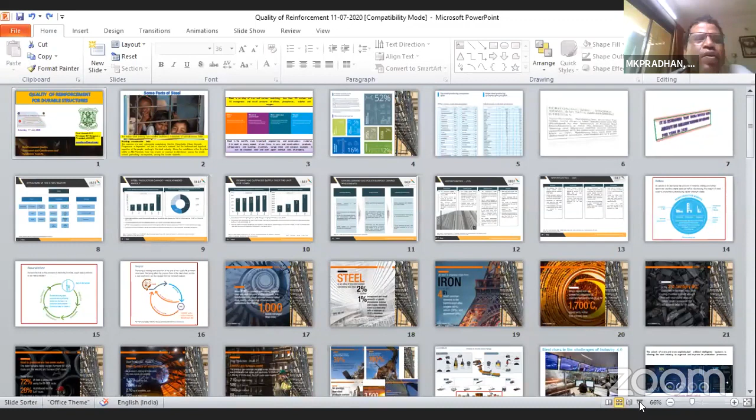Sir, I want to ask a little query. What is the sampling rate for the tensile test, bend test, all this at site? Suppose I'm getting 50 ton steel, 100 ton steel, or 200 ton steel in a lot, is there any specific guideline for the sampling rate?

Sampling, I think it is given in IS 1786. I don't exactly remember, but for every batch of manufactured steel there should be a test, if you're getting from the same source. For every 30 tons, we do one sampling, sir. Okay, maybe that's why I'm asking, is it related to the batch or any specific tonnage specified there? That is not clear, please check the code, you will get the exact sampling rate. I don't remember it right now, okay.

Yeah, so this is Chandrasekhar here. Yes sir, please. I'm a civil engineer, I do consulting also, and I have my own construction company. So I got two questions. Sir, all these webinars, do we get any recordings of them? Has it been posted anywhere?

Most of the webinars are recorded and will be placed on their respective websites. ACC has conducted more than 30 webinars during this COVID-19 season with various industry partnerships, some with Ramco Cement, some with SK Steel, some with Ultratech, even the Indian Concrete Institute, where I was vice president for the previous term, doing a lot of webinars through ICI Bangalore Center and the All India headquarters. If you visit the ICI website, you get a lot of webinar recordings there, on the ACC website, and on Ramco Cement's website. I also request the organizers of this program to upload the recording on their website link, that will be useful for all the members.

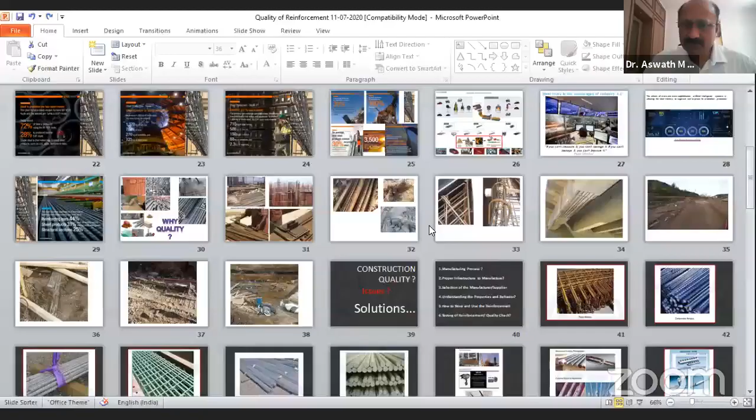Rather than welding, couplers are now available. I've shown some slides on couplers. It's easy to use couplers instead of welding. This is more effective and faster for lapping and splices.

My question is about the replacement of starter bars. If we want to replace the starter and use a tie member, welding it with stirrups to our main reinforcement, then what happens at the vertical reinforcement, and what are the pros and cons of that welding effect?

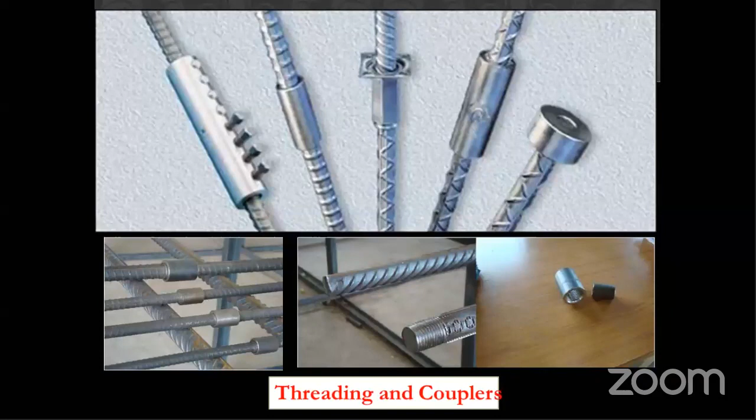For the starters, I'm not very clear what exactly your requirement is. Please mail your question to my email address. I will consult some other experts and come back to you.